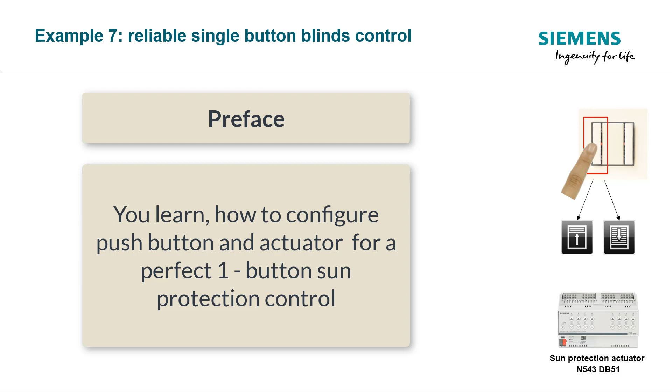Application Example 7. Manual operation via one-button operation. This learning module shows how you can still reliably raise and lower the sunshade with a single button. It is explained which conditions have to be observed and how the coupling between actuator channel and push button has to be designed.

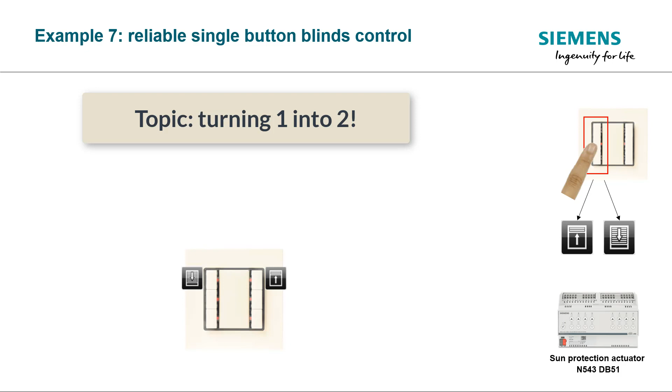Initial situation. Perhaps you have already encountered this situation before. An already installed push-button sensor with rocker operation for sun protection. That means one button for shutting down and a second button for raising is to be used for a further sun protection function. Limiting condition. It is not possible to install a push button with more rockers at the same position.

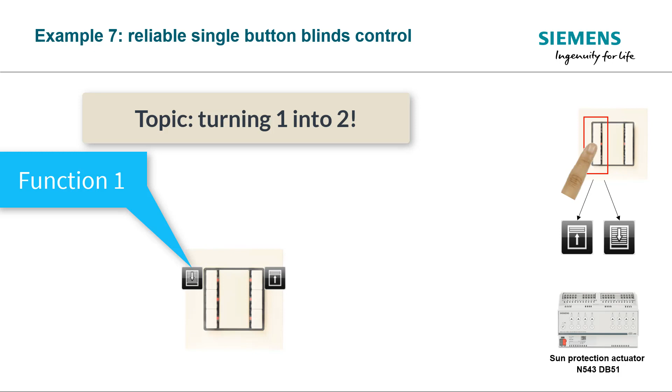Now remember that instead of 2 buttons, it is also possible to set to a one-button operation, and thus turning one operation function into 2. First, we must change the parameters of our button. Here, we change the default setting button pair to single buttons. Then we select one-button solar protection control as the function.

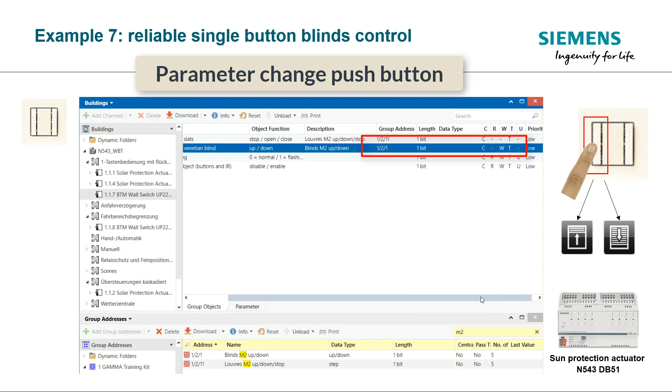This results in the same objects as with the rocker function. Then, connect them as usual with the 2 group addresses. But is that all? If we take a closer look, there's a small difference. The Venetian blind up-down object has a set write flag in one-button operation.

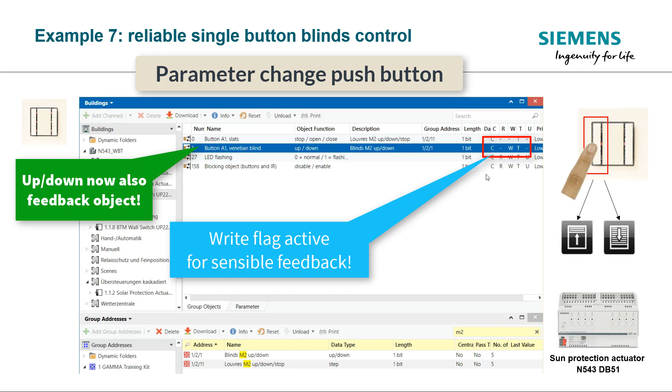This means that it has a similar function to the one-button switching function, if the connected actuator channel is still controlled from another side. This can also be communicated to the push-button switching object via the status feedback. But which status can be considered for the sun protection actuator? The point here is that the next time the push button is pressed for a long time, the sunshade should move in the opposite direction to the one last controlled.

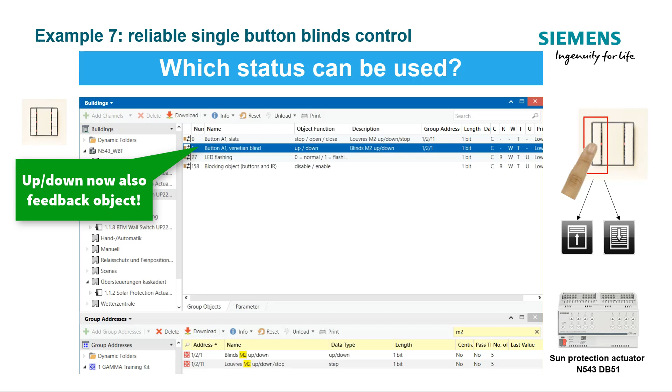Until now, sun protection actuators only had end position and position status messages. Neither is suitable for communicating something useful to such an object. So what would be a sensible feedback in this context? Well, it should be the status of the last direction of motion. The N543 can provide you with the status message you need.

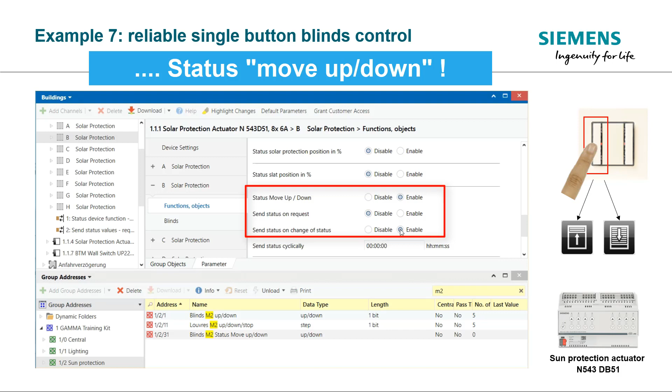We just return to the page Functions, Objects. In the lower area are the status messages. Choose Status Move Up, Down. When we enable it, and also the Send on Status Change, the actuator channel can now update the push button, even if it was moved via an 8-bit value telegram or a 1-bit control telegram.

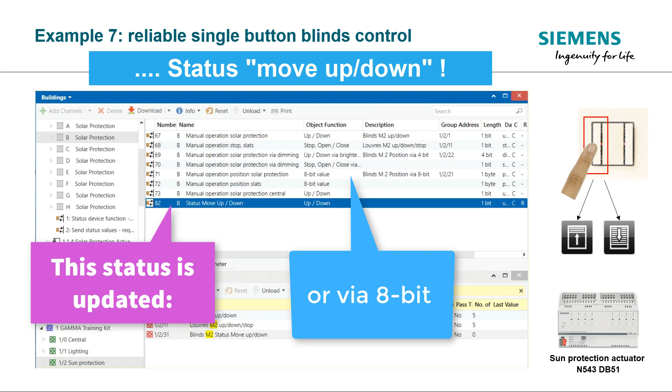The following applies generally to the Move Up, Down status object. It synchronizes itself with every movement command, regardless of whether manual or automatic, and regardless of whether 1-bit, 4-bit, or 8-bit. With step commands, on the other hand, this object is not updated.

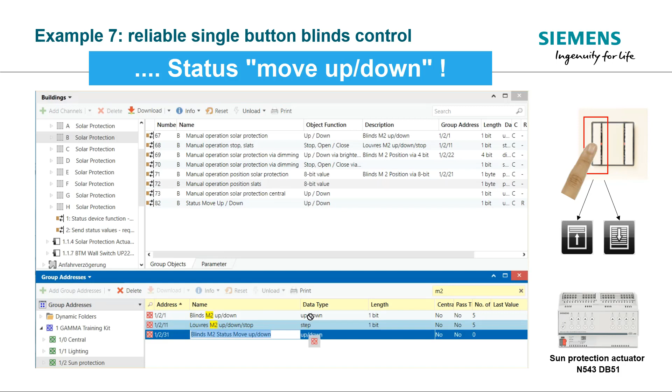At the end of this e-learning module, we connect the group address blind M2 move status with the blind up-down object of the push button. Now, the push button will always send the correct telegrams even in one-button configuration.

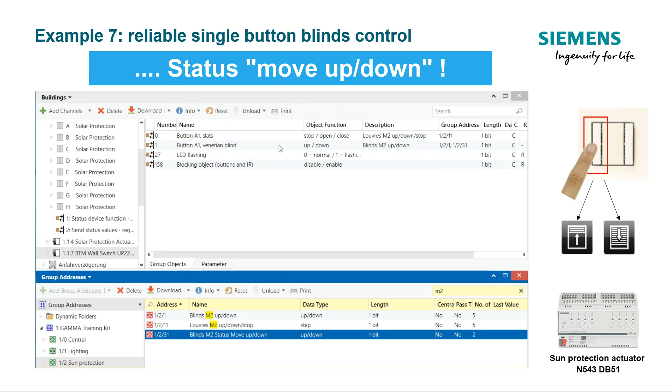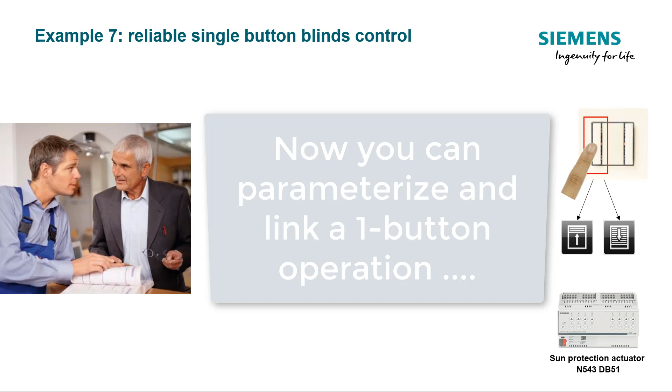We have now reached the end of this module, Manual Operation via One-Button Operation. You are now in a position to correctly parameterize and link a one-button operating function with the N543.